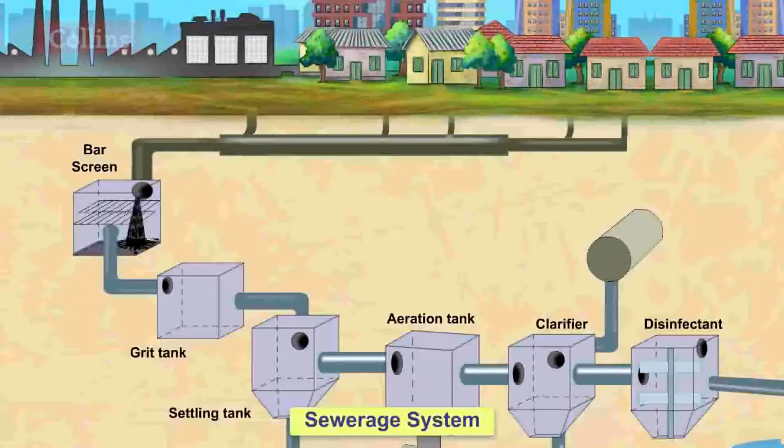Cities and towns have sewerage systems in place to carry the wastewater from our homes, hotels, factories, and other establishments to a sewerage treatment plant where the wastewater is treated. It is then deemed safe to release into other water sources. The treatment of wastewater goes through different stages. Wastewater is treated to remove the physical, chemical, and biological contaminants present in it through various processes.

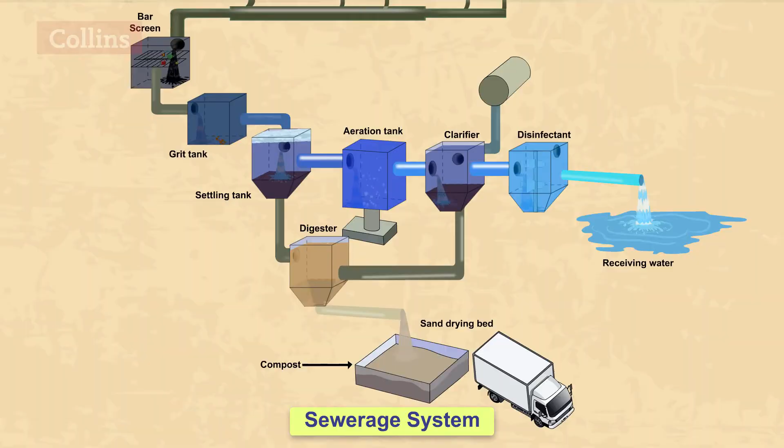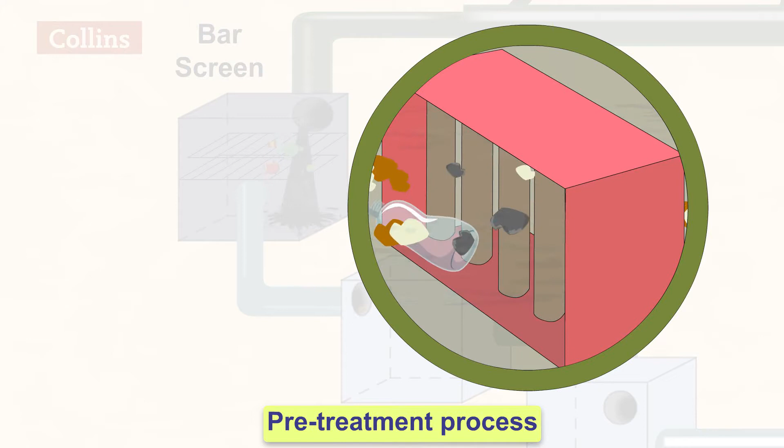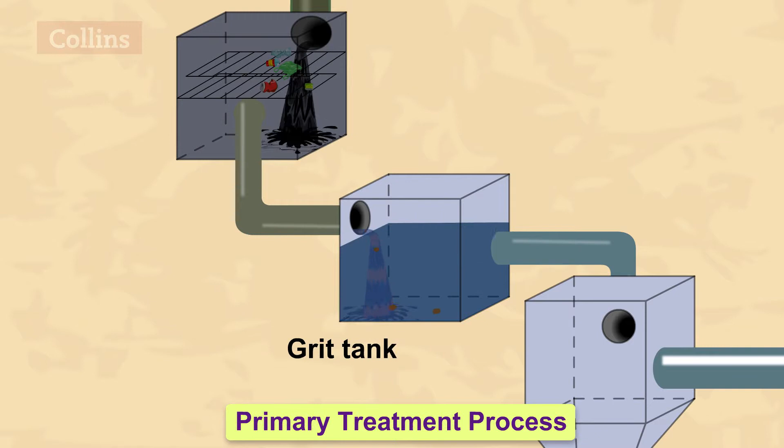The pre-treatment process involves the sewage being sent through grids or vertical bars that can remove large solid substances like metal cans, paper, and plastic materials. In primary treatment process, the sewage flows through the grit chamber very slowly, so that the sand, pebbles, and soil settle down at the bottom.

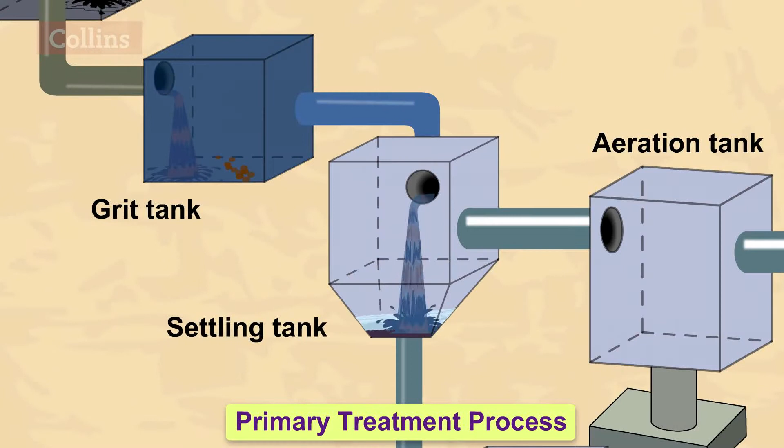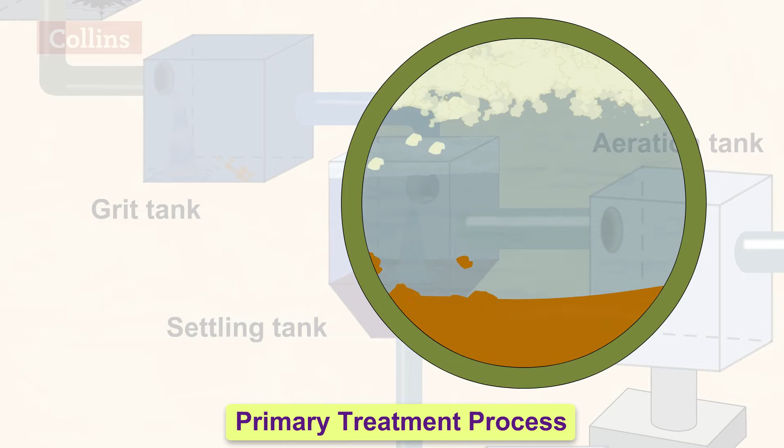The sewage flows into the settling tank or sedimentation tank, where the solid wastes like feces are allowed to settle down. Wastes such as soaps, oils, and grease rise to the top of the wastewater. The waste material that settles down at the bottom is called the sludge, and the floatable material is called the scum. Scum is then removed using a skimmer, and sludge is removed with a scraper every few days. The water that is left out is called the clarified water.

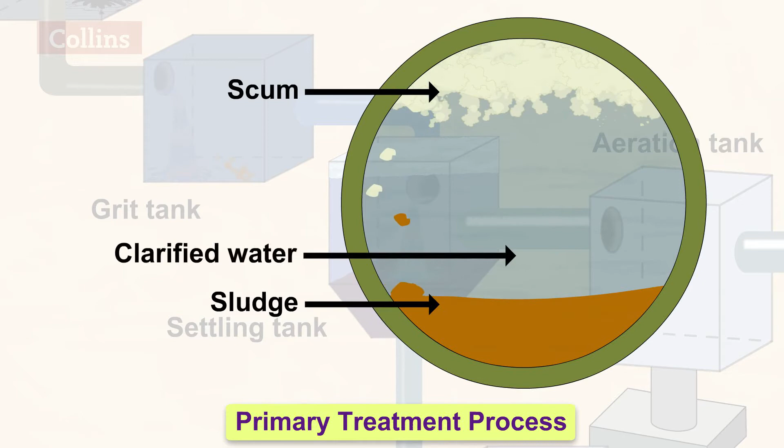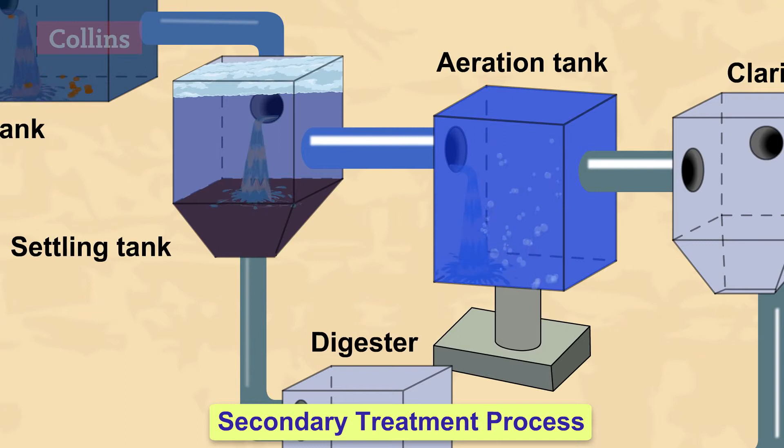In the secondary treatment process, biological or organic wastes are removed. It is a biological process. This is done by transferring the clarified water into an aeration tank, where air blowers bubble air, which helps the aerobic bacteria to grow and feed on the organic contaminants such as food waste, feces, and other organisms.

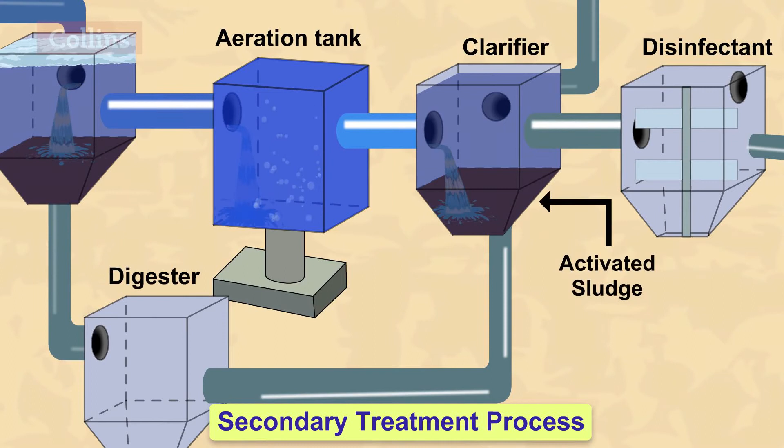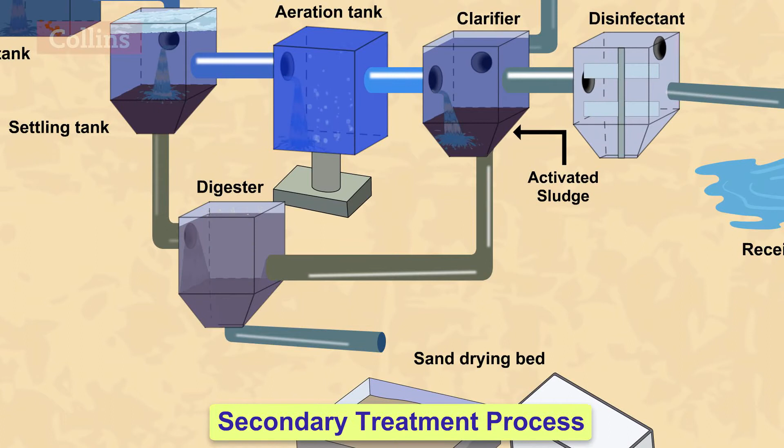The mixture then flows from the aeration tank into the clarifier, where activated sludge settles out by gravity. The activated sludge so produced, along with the sludge produced in the primary process, is transferred to the digester, where it is decomposed by anaerobic bacteria. Biogas is produced in this process, which can be used as fuel or can be used to produce electricity.

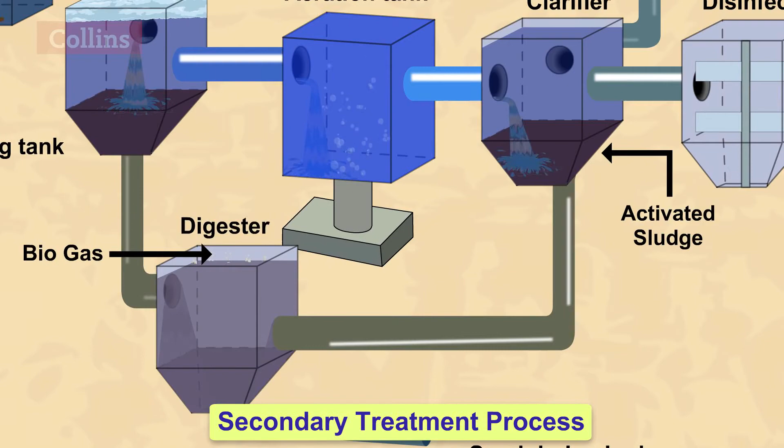The activated sludge is then left in the sand drying beds. Some quantity of water in the activated sludge evaporates, and the remaining quantity drains through the sand beds. This leaves behind the remaining dried sludge, which can be used for making fertilizers or compost.

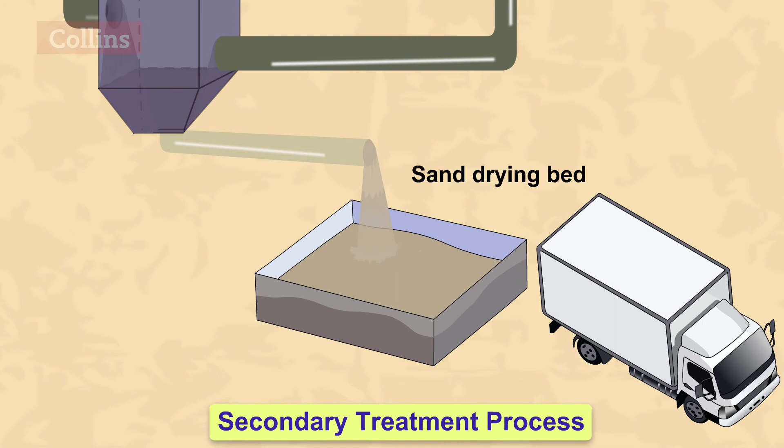In the tertiary treatment process, the leftover wastewater is treated with chlorine to remove the phosphorus compounds, nitrogen compounds, and bacteria. It is a chemical process. Chlorine tablets are added to kill the germs. This process is called chlorination. Then this water is let off into the water bodies.